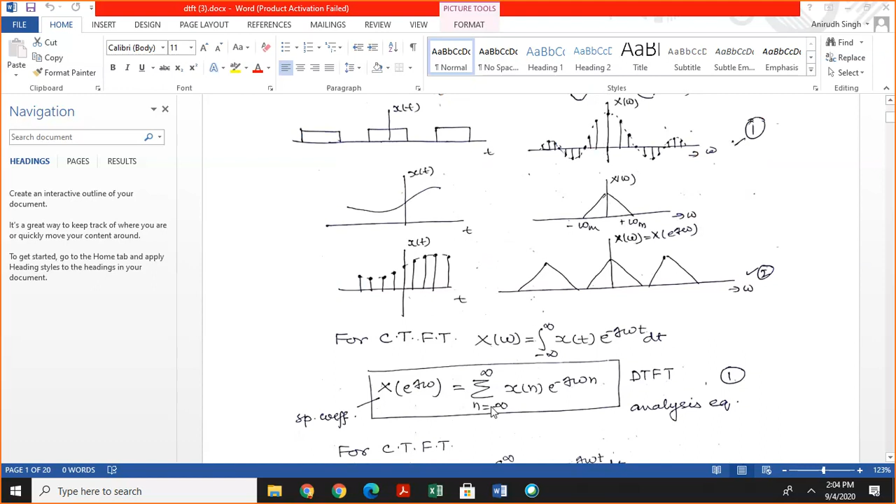For the continuous Fourier transform, the inverse Fourier transform is given by x of t equals 1 by 2 pi integration from minus infinity to plus infinity of X of omega exponential j omega t d omega. In this case, t is replaced by n. For a discrete signal, x of n is given by 1 by 2 pi. Here there is no change in the integration because for this discrete signal, the Fourier transform is continuous.

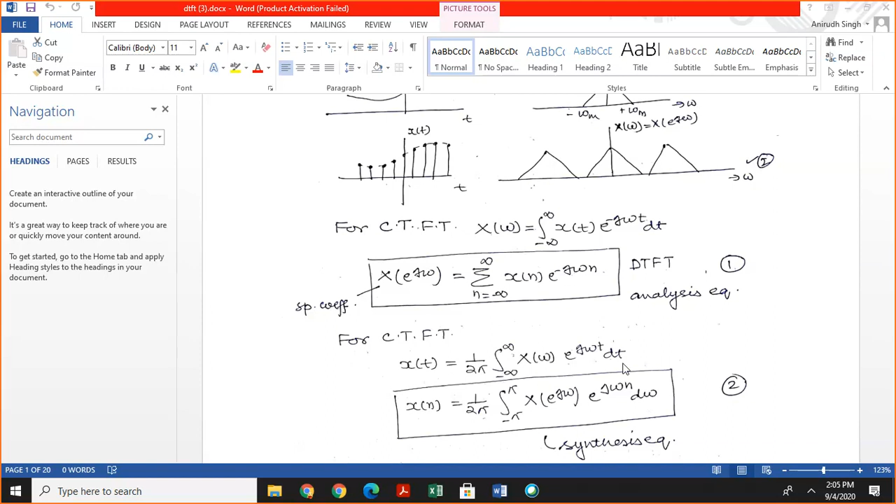So the Fourier transform is continuous, so there is no change in the integration sign, and this Fourier transform is periodic with period 2 pi. So the limit is changed to minus pi to plus pi, or 0 to 2 pi, of X of exponential j omega multiplied by exponential j omega n d omega. t is changed to omega. And this is the synthesis equation.

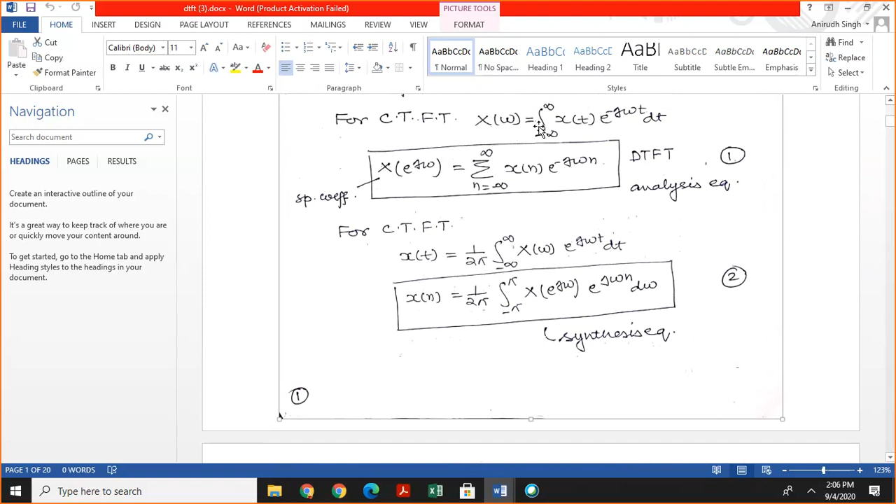In this equation, why have we not changed this integration to summation? This is clear in this figure. This continuous signal's Fourier transform is continuous, and for the discrete signal its Fourier transform is also continuous, but this Fourier transform is periodic with period 2 pi. So in this case, the integration is not changed for the discrete signal, while in the analysis equation, the integration is changed into summation.

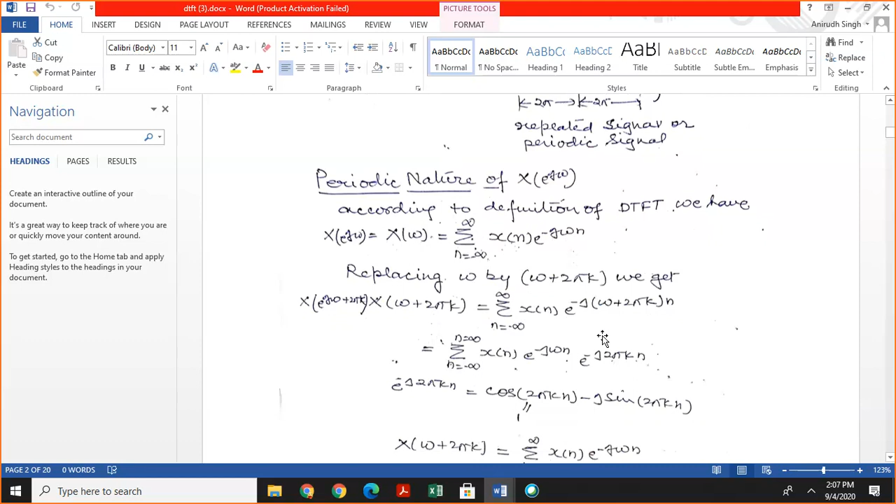Then let us discuss the periodic nature of X of e to the j omega. According to the definition of DTFT, we know that X of exponential j omega is given by summation from n equals minus infinity to plus infinity of x of n exponential minus j omega n. If we replace omega by omega plus 2 pi k, we can write X of omega plus 2 pi k, and this expression is simplified in this form: exponential minus j omega n multiplied by exponential minus j 2 pi k n.

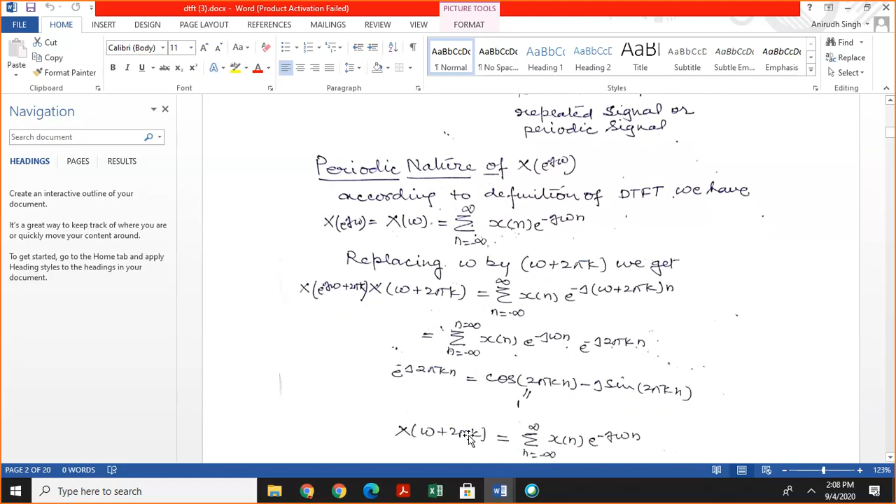But the value of exponential minus j 2 pi k n is equal to cos 2 pi k n minus j sin 2 pi k n, and the value of cos 2 pi k n is always 1 and the value of sin 2 pi k n is 0. So we can say that X of omega plus 2 pi k is equal to summation from minus infinity to plus infinity x of n exponential minus j omega n, and this is equal to X of omega. It means that X of exponential j omega is periodic with period 2 pi.

Condition for existence of Fourier transform. Fourier transform exists only if the discrete time signal is absolutely summable. Means if we sum the mod of x of n, its value is always some finite value, or always less than infinity. Basically, the Fourier transform of an aperiodic finite energy discrete time signal is called discrete time Fourier transform.

Then properties of discrete time Fourier transform. Periodicity: X of exponential j omega is given by summation x of n exponential minus j omega n, and if we substitute omega by omega plus 2 pi l, then it is written as x of n exponential minus j n omega plus 2 pi l, and exponential minus j 2 pi l n is equal to 1. So X of exponential j omega plus 2 pi l is equal to X of exponential j omega. So we can say that the Fourier transform or DTFT is periodic in frequency with period 2 pi.

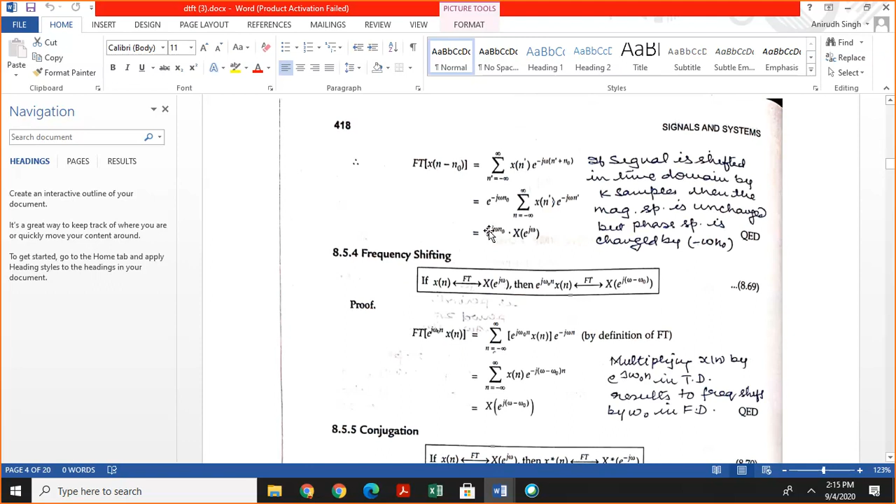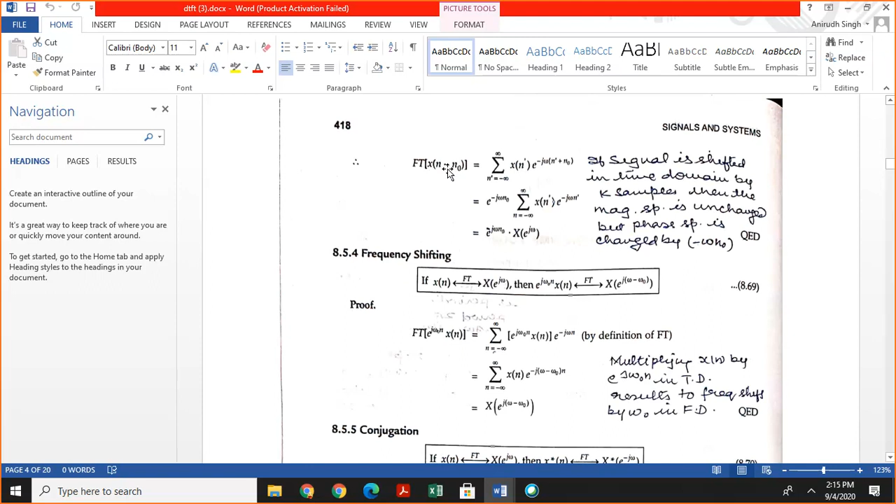While in case of time domain shifting, this negative sign is the same. Means in case of time shifting the sign is the same in time domain and frequency domain, while in case of frequency shifting the sign is changed. If in time domain the sign is plus, in frequency domain it is changed to a negative sign.

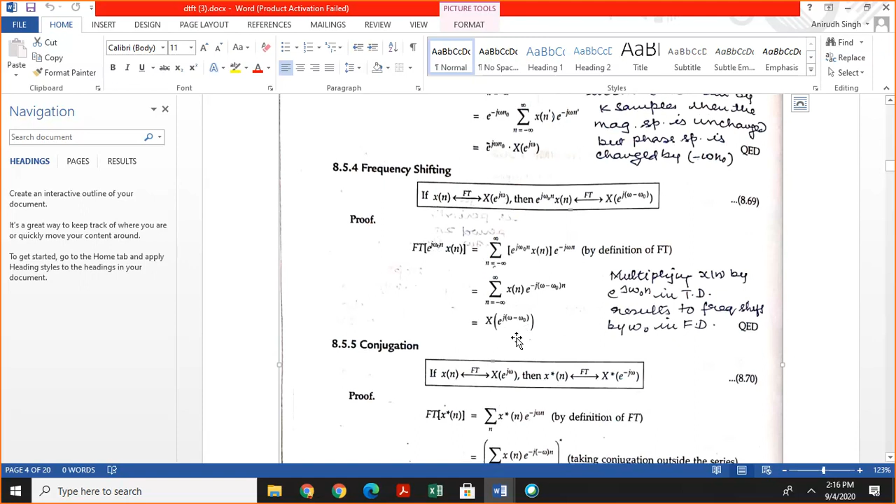Then time reversal. If the Fourier transform of x of n is given by X of exponential j omega, then calculate the Fourier transform of x of minus n. The Fourier transform of x of minus n is given by summation x of minus n exponential minus j omega n.

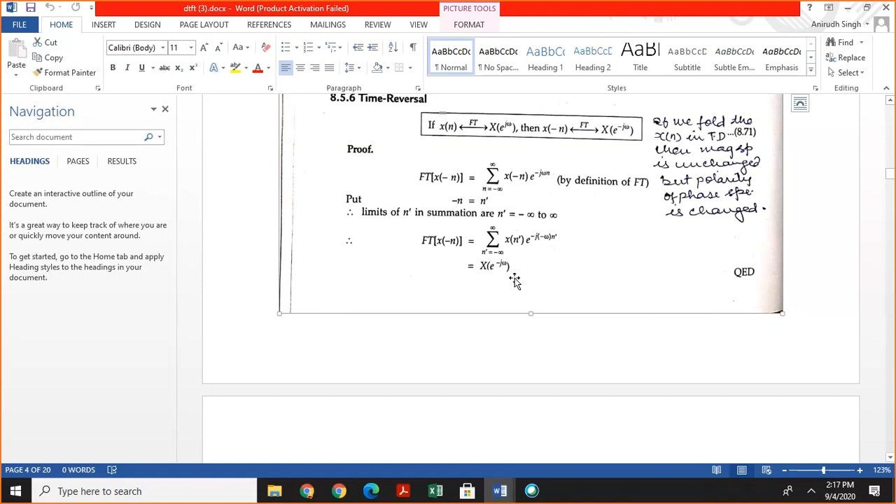The limit of summation is from minus infinity to plus infinity, and if we substitute minus n equal to n dash, we get x of n dash, and minus n is replaced by n dash, meaning exponential j omega n dash, which is written as exponential minus j minus omega n dash, and this is written as X of exponential minus j omega. So we can say that if we fold x of n in the time domain, then the magnitude spectrum remains the same, but the polarity of the phase spectrum is changed.

Time expansion or interpolation. If the Fourier transform of x of n is given by X of exponential j omega, then the Fourier transform of x of n by capital M is given by X of exponential j M omega. In this case there is no M, so this is simply written as exponential j omega, and in this case, exponential j M omega.

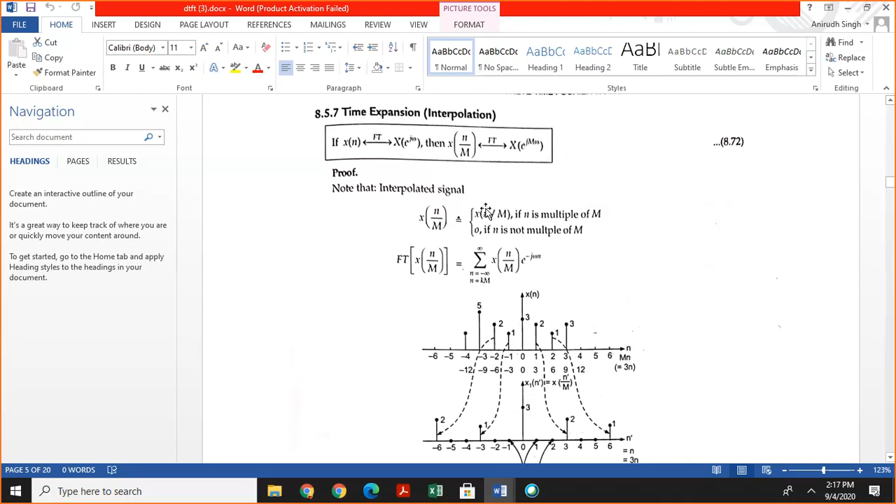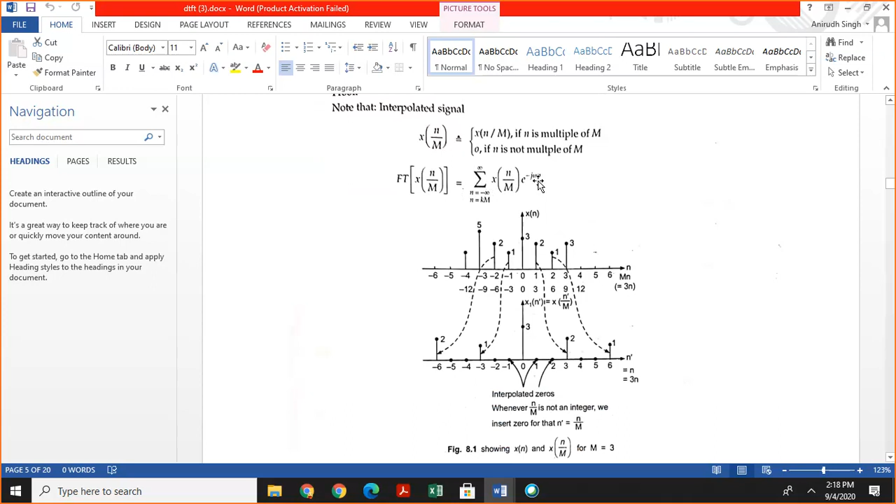Calculate the Fourier transform of x of n by M, and this is given by summation x of n by M exponential minus j omega n. Then substitute n by M equal to n dash. Then this equation is converted into x of n dash exponential minus j omega n. The value of n is n dash multiplied by M; substitute this value of n, and this is written as summation x of n dash exponential minus j omega M n dash. This is written as X of exponential j M omega.

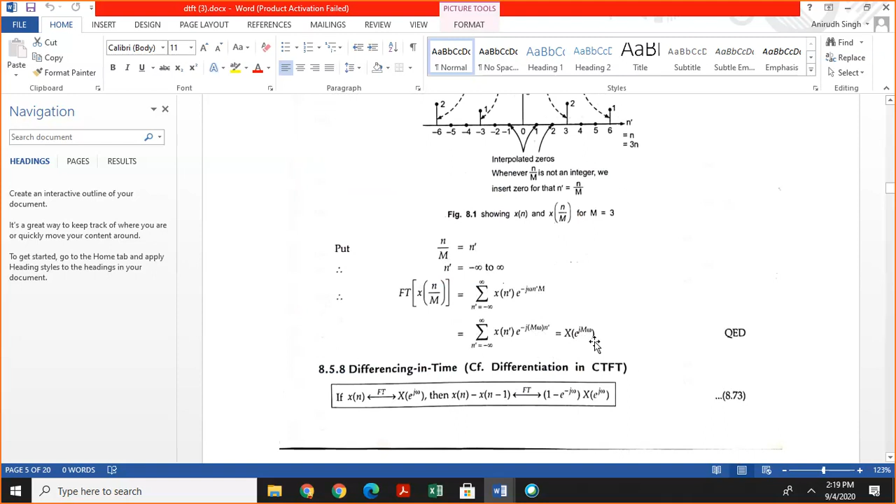The meaning of this property is clear in this example. Suppose that a discrete time signal x of n is given by 1, 3, 2, 1. And this arrow indicates the value of x of n at n equal to 0. So we draw this signal: when n is equal to 0, the value of x of n is 3. When n is equal to minus 1, the value of x of n is 1. When n is 1, the value of x of n is 2. Similarly, when n is 2, the value of x of n is 1.

Hello? If you have any problem, please discuss. Aru, Anuja, hello? Gaurav, Arunama.

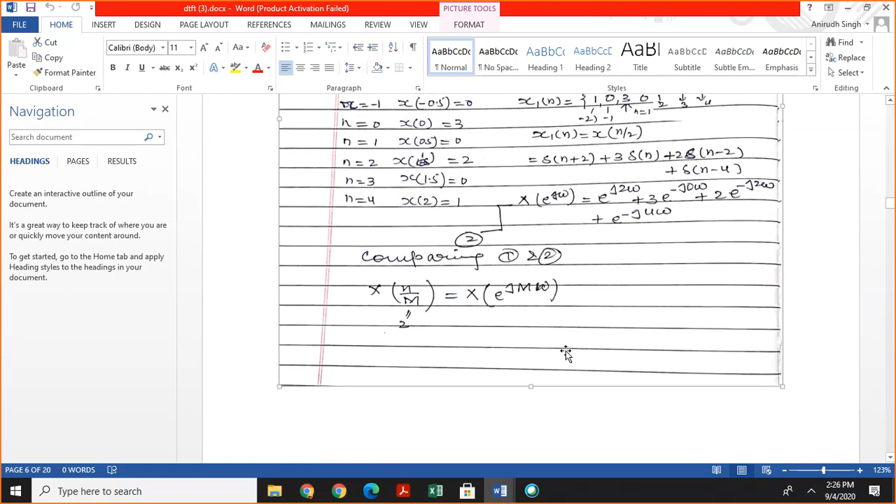The next property is differencing in time. If Fourier transform of x of n is x of exponential j omega, then determine the Fourier transform of x of n minus x of n minus 1. Fourier transform of x of n is given by x of exponential j omega, and Fourier transform of x of n minus 1 is time domain shifting. So in time domain shifting, there is no change in sign. So exponential minus j omega multiplied by x of exponential j omega, and it is written as discrete differentiation in time domain.

In case of discrete signal, then differentiation in frequency domain. If Fourier transform of x of n is given by x of exponential j omega, then differentiating in frequency domain, we simply multiply n by x of n.

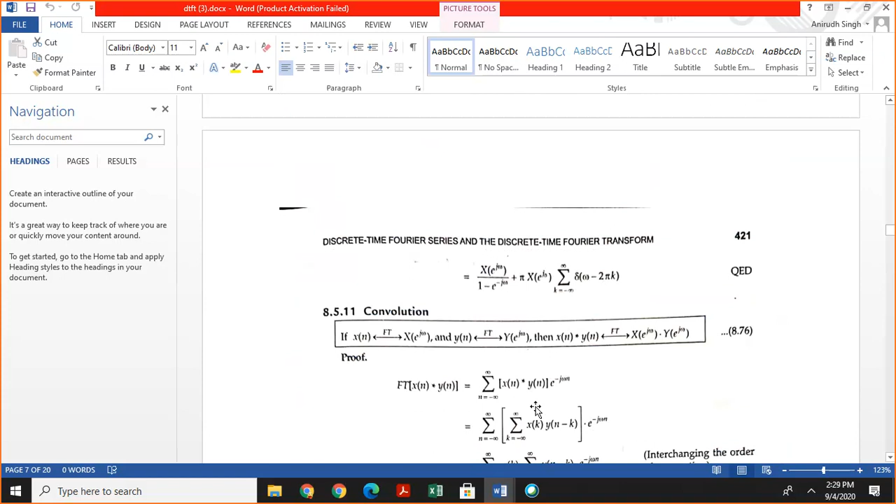Convolution. Next property is convolution. If Fourier transform of x of n is given by x of exponential j omega, and Fourier transform of y of n is given by y of exponential j omega, then you calculate the Fourier transform of x of n convolution y of n, which is written by this expression, and convolution of x of n and y of n is written by summation k from minus infinity to plus infinity x of k y of n minus k.

Interchanging the order of summation, means if we take summation k from minus infinity to plus infinity x of k out of this summation sign, and then put n minus k is equal to m, then this expression is written as summation x of k multiplied summation y of m exponential minus j omega m plus k. For this summation sign exponential minus j omega k is constant, and we take it out of this summation sign. This is the Fourier transform of x of n, and this is the Fourier transform of y of n, so we can simply write: if signals are convoluted in time domain, their coefficients are simply multiplied in frequency domain.